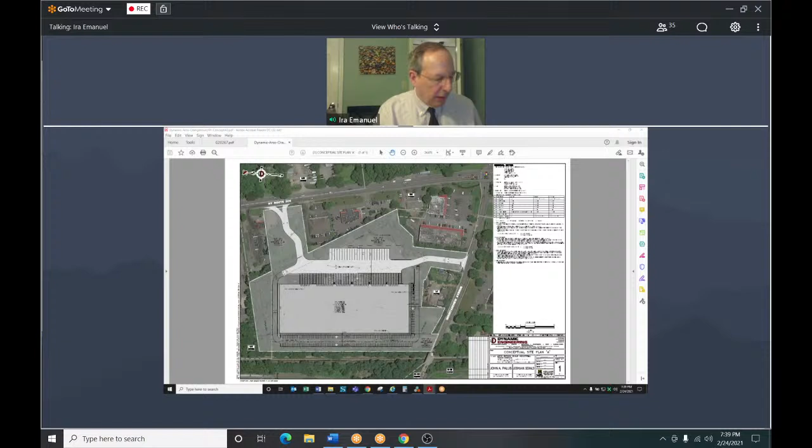With respect to Ms. Slavin's comments, we are aware of that. We disagree with the need for a use variance for the size of the warehouse being proposed, and I'll talk with Ms. Slavin offline about that. I've got some information I can present to her. If we need to get an area variance, I think we can make the case to the ZBA, but it would be an area variance, not a use variance for the size of the building. With respect to her other comments, we don't have a particular problem with them. We understand them.

Item 7, 8, and 9, I would just like to generally discuss. I actually spoke with Mr. Peters prior to even filing this concept plan. I understand his intent and goal is to limit the amount of impervious coverage as much as possible on site and reduce unnecessary impervious coverage. For example, comment number 7 asks us to reduce the size of the access aisles, which are currently 30 to 35 feet wide, down to more of 20 to 24 feet. Overall, for tractor trailers going in each direction, the access aisle must be that wide to comply with that, and we can run truck circulation plans to show why that works.

I do agree with Mr. Peters that the smaller access aisle, like for the car areas, being around 24, 25 feet is more appropriate. However, in the areas where we have tractor trailers coming in from either road, pulling forward and then backing into their loading dock position, there needs to be a nice wide access aisle for safety and maneuverability purposes. Okay, you have to work them out with him. Absolutely.

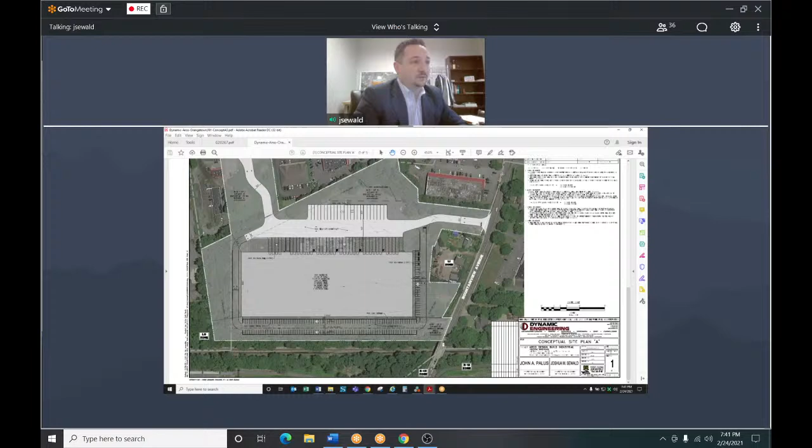And really, I guess this ties in Ms. Slavin's as well as Mr. Peters' review, it's really the parking. The requirement for parking in your municipality is high, it's 586 spaces, and we're providing 180 just to try to get as close as we can to that requirement, even though our traffic regulations really talk about having much less parking, under 100 spaces. I just wanted to get any comments from either the board members or your professionals on if the board is okay with providing much less parking for this type of facility. We think there's always benefits to not paving over unnecessary areas of the lot for parking spaces that will never be utilized. Okay, thank you.

If I may, on Mr. Peters' letter, number 9, where he suggests we use Grasscrete for some of the fire access or fire lanes - does the board accept Grasscrete? Many boards around the county and in the lower Hudson Valley have moved away from Grasscrete because of some difficulties they've experienced with it. But if Grasscrete is something the board is willing to consider, then we will consider it as well. Okay, we have in the past considered it.

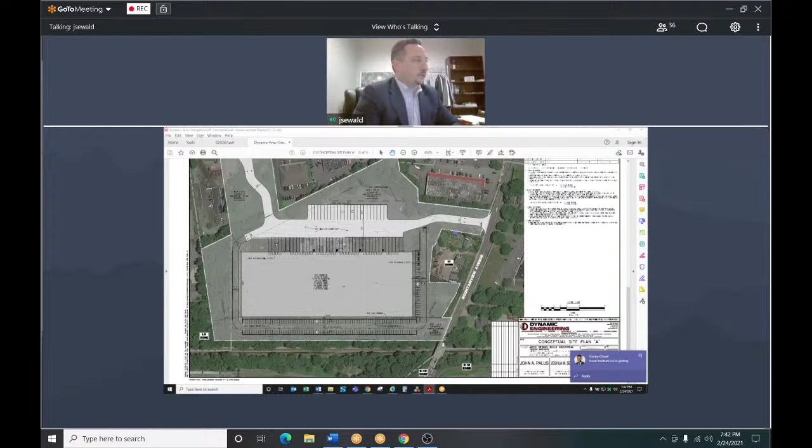Okay, next is the Bureau of Fire Prevention, February 24th, and he has 5 items. Yeah, no problems here, thank you. Okay, Rockland County Sewer District number 1, February 17th.

Same here, no issues here. They have 5 items. No, 4. 1 through 4.

Okay, and then I have a narrative by Mr. Emanuel, and I have a copy of the traffic study prepared by Dynamic Traffic. Cheryl, is there anything that I missed? That's everything. Thank you very much.

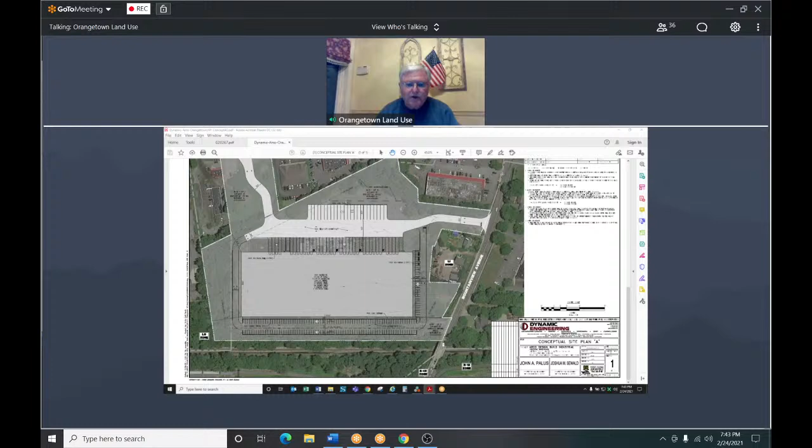I have a couple concerns. Really, this is me, I don't know what the rest of the board feels, but I have a bit of an issue with putting tractor trailers on Mountain View Avenue. It's a 2-lane road. I think, like I said, it's a residential area. There's a couple of schools, there's 2 shopping centers in that area. And I'd really hate to mix tractor trailers on that road. Also,

I don't know if it was picked up in the traffic study, but there's a prospective application across the road over on Greenbush Road, which is going to have tractor trailers in this area. So I hope all this is taken into consideration. Okay, I'm going to open it up to the board now and see what your opinions are.

Thank you, Mr. Chairman. I do have concerns over sending trucks onto Mountain View as well. I mean, the reason why, Mr. Emanuel, you have so many parking spots is because you're creating a large building. But I agree with you in concept that is way too many parking spaces, and I can see you getting a variance for that. Don't mind the access to Route 303 as well, and how busy that road is, and trying to keep trucks off of Mountain View.

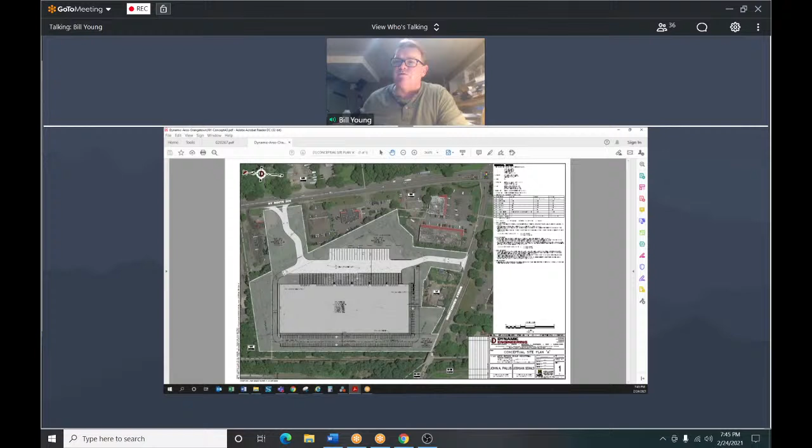Thank you, Mr. Chairman. Thank you very much. Mr. Mandel. Thank you, Mr. Chairman. There's several comments to make on this.

Taking a look, first I wanted to mention the site plan doesn't show the easements. As I think Rockland County Sewer or whoever mentioned, the easements have to be shown here before you can really get a final conceptual plan. The way it looks now, part of that building or parking lot or permanent structures could be on the easements, which would be prohibited. So therefore, I think you have to do that. When you do come back, you have to show compliance with the 303 overlay.

Now, one of the questions I have, what's the proposed use of this warehouse? Do you have a tenant yet? It's a speculative warehouse, sir. Do you have no idea who's going to move in? No. Or what kind of company or how many vehicles or trucks?

Typically, the applicant is an industrial development company. They specialize in knowing the market and the areas and the truck routes, and they have a wide national tenant base that they will be able to lease this building out to. Due to the lengthy process of entitlements plus lengthy process of construction for the size of facility, most of these type of facilities are not leased up at the current conceptual phase.

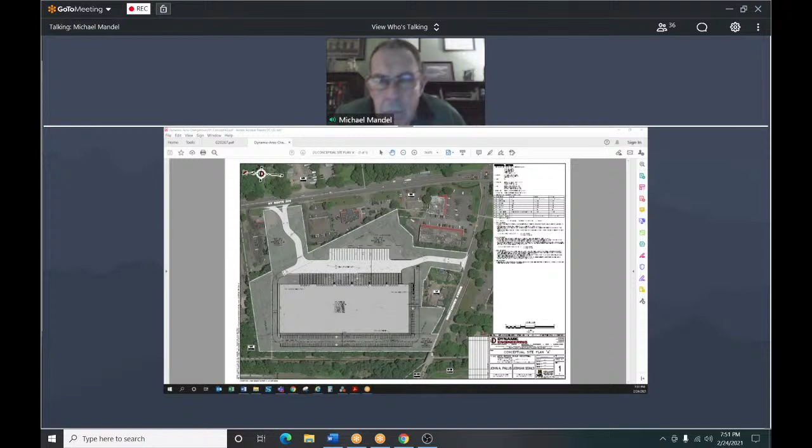I actually have my partner Corey, our licensed professional traffic engineer, on the call. If you could just jump in real quick, Corey, and answer that question.

That's a great question. Because of the impacts of COVID on existing traffic flows, we did updated traffic counts out there, which are current and reflect existing conditions at the intersection. But we also compared those to prior data to see if they needed to be factored or adjusted up to account for any downturn in traffic, which we've seen across the board as a result of decreased commuting due to COVID. So it does account for that, and these volumes were in fact factored up beyond the existing counts to account for any potential downturn in traffic along the 303 corridor.

Amazon is up and running, but UPS is not up and running yet, so I would take a look at that and add that into your traffic study. One last thing.

DEME number 4, they talk about soil borings and perc tests. When you conduct them, they must be witnessed, because we've been having people coming forward without having these witnessed. They must be witnessed by a member of the DEME. If they're not witnessed, they're not acceptable to DEME and therefore not acceptable to us. You'll be notified and made aware of it, and he prefers it being done in the spring or fall when the groundwater is highest. So I recommend, if you go forward, that you speak to him and set those things up right off the bat. Thank you, I have no further questions at this time.

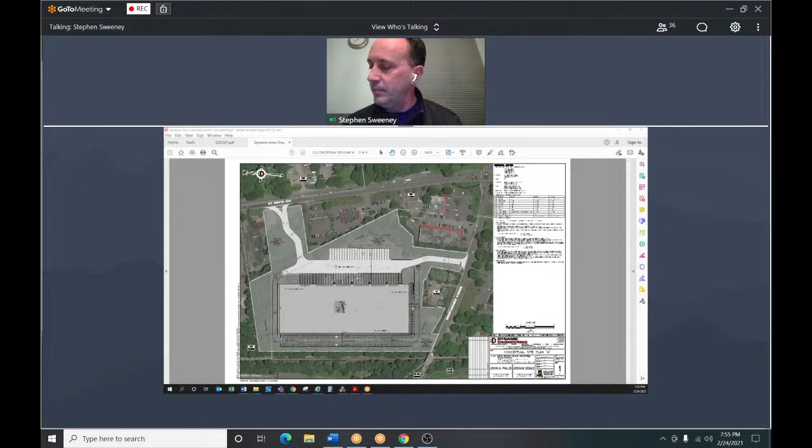Okay, thank you, Mr. Sweeney. Mr. Dell. Thank you very much, Mr. Chairman. First, I'd like to thank the applicants for bringing it in at an early stage rather than at a later stage where they would have spent considerably more resources in developing it and then claim some sort of hardship, which often happens to us.

That being said, I agree with what the other board members said, with all of them, Mr. Mendel, Mr. Sweeney, everybody. I have some concerns myself. First of all, obviously NYS DOT, New York State Department of Transportation, should have something to say about it, and hopefully they would get it back to us in a timely fashion. I would suggest it be sent to them as soon as possible regarding Route 303. With a right exit, I wonder where the trucks are going to do their turnaround. That would be another issue.

But the bigger thing I see here is it's a very large building relatively, and somehow or other, you're projecting only 5 truck trips per day and 1 truck exiting. And this is speculative. I think that figure is more than a little low, because even just filling it up would take you, at the calculations of the size of a tractor trailer, 70 days at this rate just even to get your inventory in there. So I'm kind of questioning this. A lot of the things on Mountain View, with having to obviously go out into the other lanes of traffic in order to come in and out, are a problem. I think a number of those things should be studied.

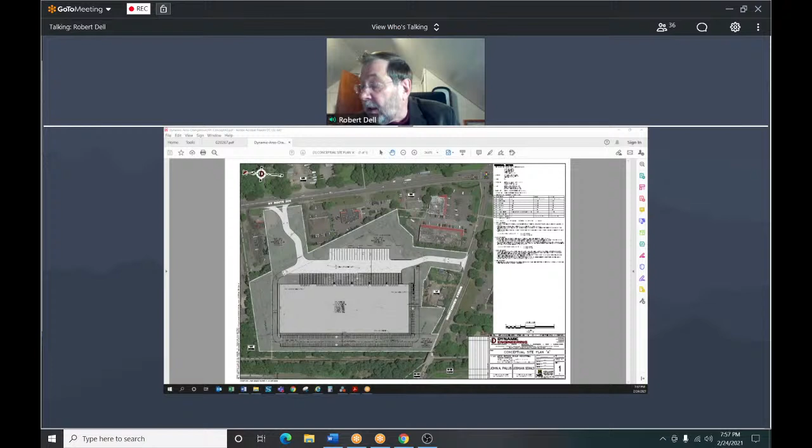The other thing I don't want to see happen, which sometimes happens with this, is we get a very rosy picture of what's happening. Oh, it's only going to be 5 trucks per day. And then when tenants start coming in, all of a sudden we hear, oh, we have a hardship situation here, so we'll need special accommodation. It's just a pattern I've seen happen many times over. I don't mean that your company is going to do that, but it's just something I think we should be more than a little bit aware of.

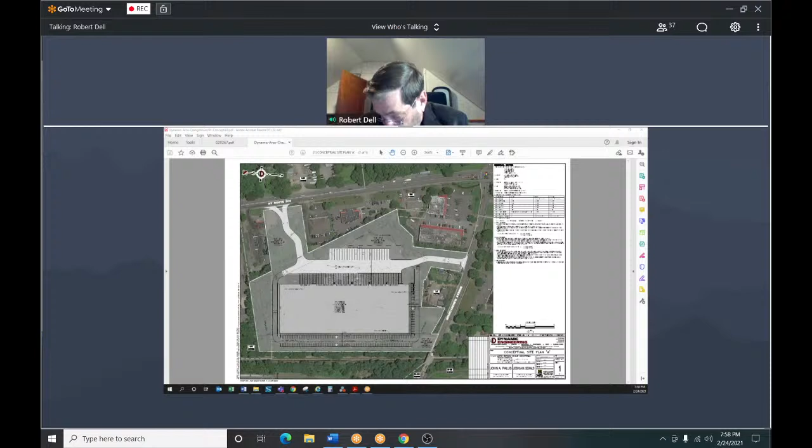The idea of using Grasscrete, I think I have no problem. If you ever had a good location to put something like this in terms of the neighborhood, this is probably close to an ideal situation. You have the railroad, you don't really have any residential areas, and I think on that part of it, it's probably a good idea.

But I question how this is going to end up. And most important, I think we should get our traffic, an independent review, to look at this and verify all this and help us with our determination. I have no doubt of the validity of your studies, but I think it's probably based on more than conservative estimates as to the actual amount of traffic that could potentially be used on this site.

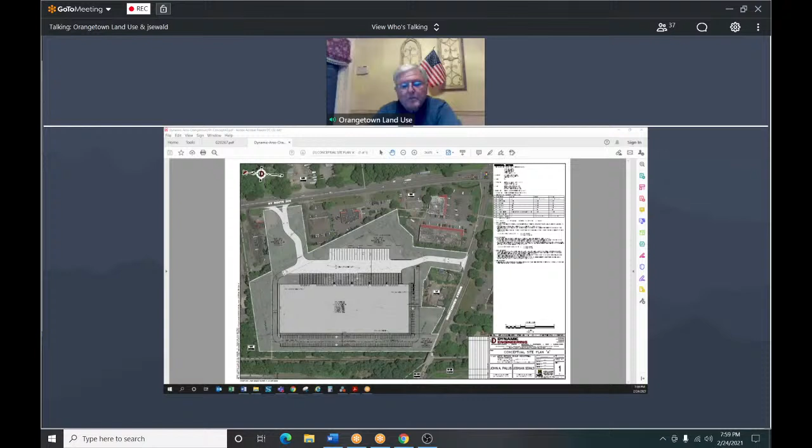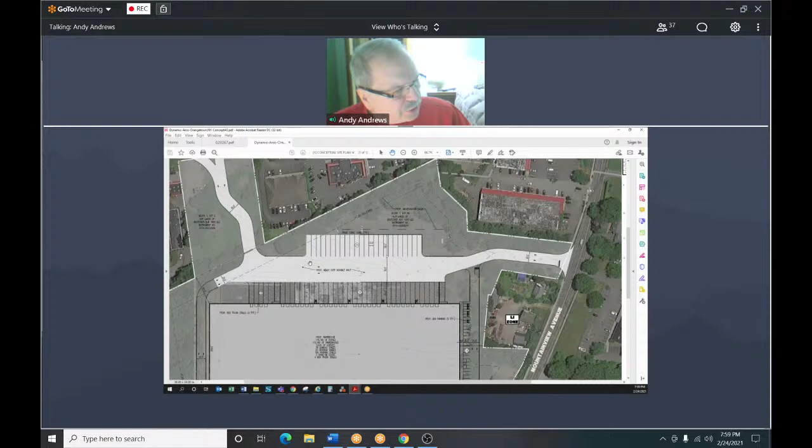I would just like to ditto everybody else's concerns. I noticed that you have 4 box truck stalls and 29 loading stalls. That's an awful lot of stalls for only the few trucks that you got coming in and out of there. So I was just wondering about that.

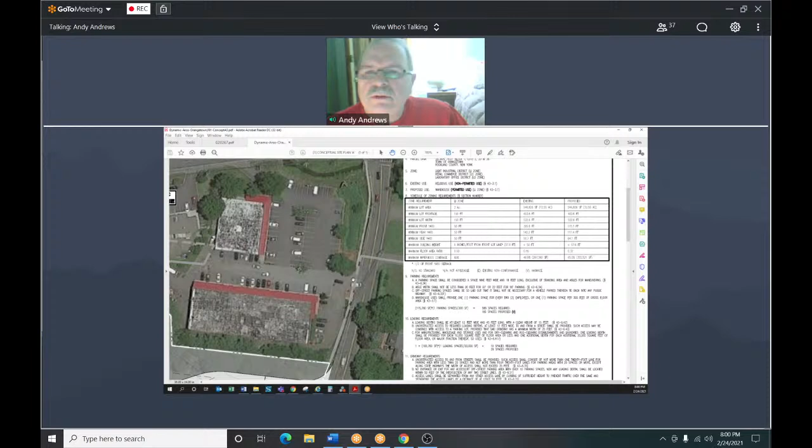The building is over 4 acres big. Does anybody know what the footprint is of the building that's there now? It's approximately 106,000 square feet, I believe. So this one's 70,000 square feet bigger. Correct.

The idea about coming in and out of Mountain View Avenue is not a good one. If you straighten out the driveway going out to 303, that's a much better idea. That'll allow trucks in and out. You got a much better turning radius out on 303 that's bigger.

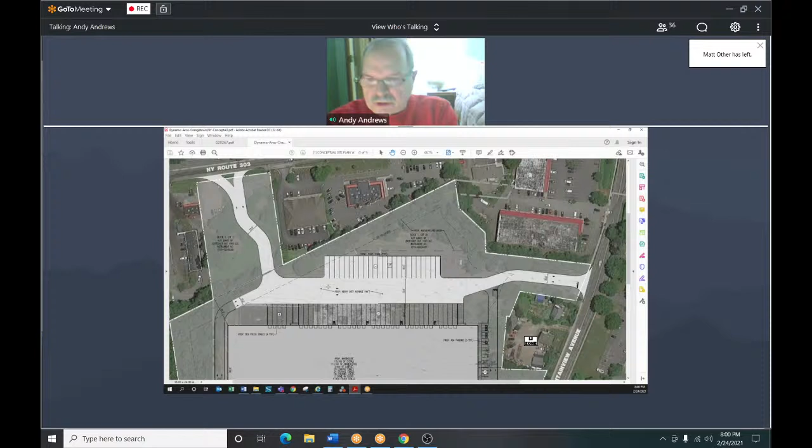One other concern that I have that wasn't mentioned is we have Amazon going in up on 303. My concern is that this is such a large warehouse that I was just wondering if this might take some overflow from Amazon, creating some more Sprinter trucks coming in and out of there besides tractor trailers. So that's a concern because you guys don't know who's going to go in here. And I think that's all I have right now.

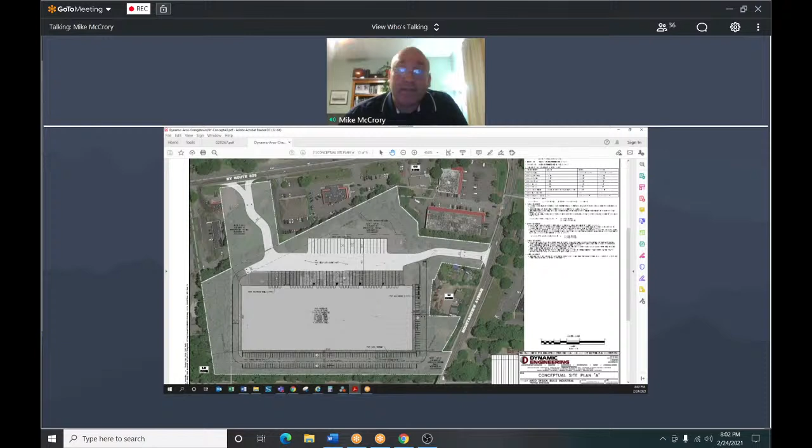And now you're having this big warehouse with no known tenant, truck problems getting on Mountain View Avenue. Even coming out of 303 is going to be a problem because there's a light right there. Right when they make that turn right, I can see it being a big disaster. And a lot of flaws in the traffic study. It doesn't include UPS, Amazon. You don't know who the tenant is, so how can the traffic study hold any weight right now? And it's a very stressed out area.

I can see this being major problems with the neighbors and with the board when we see the final plan. So that's my only comments. I just got a lot of questions. So thanks for representing it. That's it, Chairman. Thank you, Mr. McCrory. Okay, Mr. Bond.

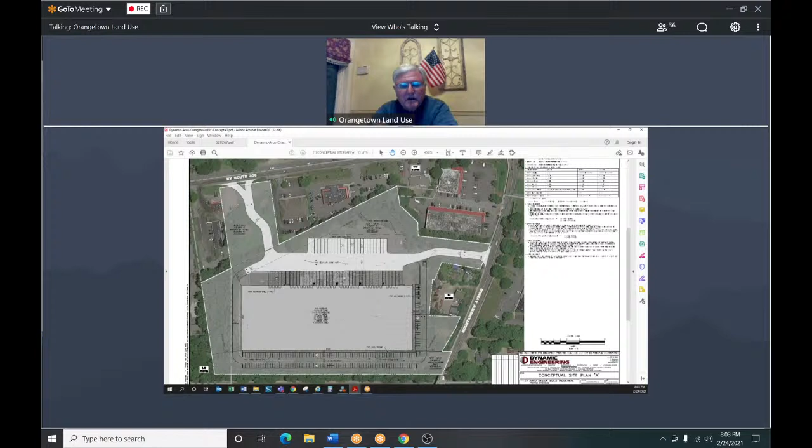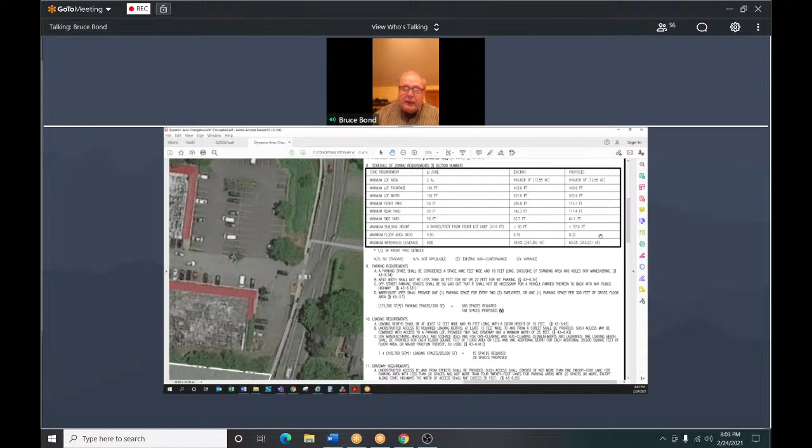I just think the warehouse is 175,000 square feet. That's a big warehouse. When you've only got 100,000 there now, I think that's kind of overdoing it a little bit. And on the coming out on the 303, has there been any thought to making improvements in terms of a traffic light? Not necessarily there, because that might be too close to the one on Mountain View, but maybe down on Glenshaw, to make it easier for your trucks to get in and out. Has there been any thought to a traffic light?

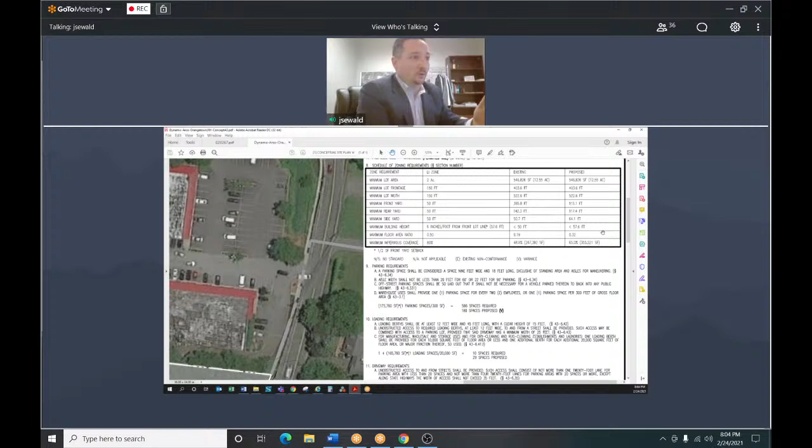I can let my partner Corey jump into it, I know there's a lot of comments flying around. And to comment on the previous point, Mr. McCrory, we appreciate the board professional's review letters that help us determine the next step. We understand the Route 303 overlay, and we agree with you. Our comment was just that, in lieu of sending truck traffic that is a permitted use within the underlying LO zone onto Mountain View Avenue, it was a consideration for the board to utilize Route 303 where truck traffic is allowed. We absolutely respect and understand the purpose of the overlay. That was an option because of all the other concerns board members had about using Mountain View Avenue for our access.

In regards to a traffic signal, even though the building is 175,000 square feet, because of the use nature, it is not an Amazon. Amazon is e-commerce, high fulfillment, lots of vans. It's under a different land use code in regards to traffic generation. I don't believe a traffic signal will be warranted at our driveway at 303. Corey can give a little more color on the different ITE land use codes and why, even though this is a big building, not a lot of traffic is generated based on the type of facility it is.

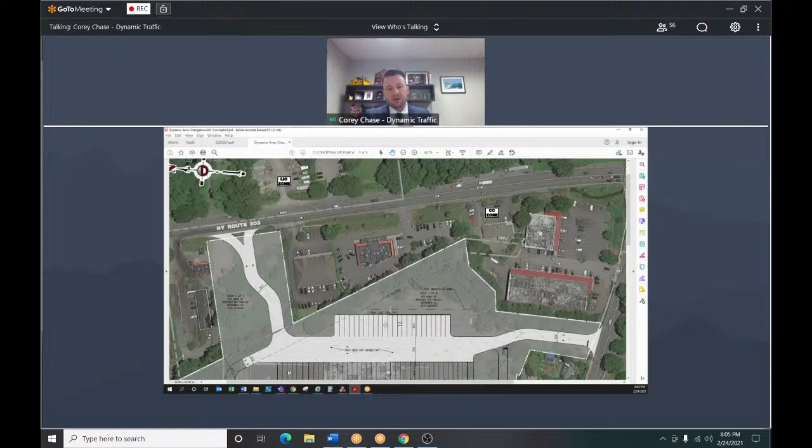Certainly, and Josh was correct. There are certain traffic volume thresholds required to be met to install a new traffic signal. Because of the traffic projected to be generated by the warehouse, even though it is 175,000 square feet, overall from a traffic generation standpoint, it's not a significant traffic generator. The numbers a couple of board members were referencing from our traffic study are peak hour traffic volumes. That's what we focus on when we analyze traffic impacts - the weekday morning peak hour and weekday evening peak hour to determine rush hour impacts. Those truck volumes referenced, the 6 trucks, that's 6 trucks an hour, approximately 1 truck every 10 minutes.

The ITE and NYSDOT have a threshold for a significant increase in traffic of 100 trips or more during a peak hour. That's what they consider a significant increase with potential significant impact on prevailing traffic conditions. This use in totality would only generate approximately 50% of that threshold - approximately 50 additional trips during a peak hour, which comes down to about 1 trip every minute during that peak period. So overall, not a substantial traffic generator, and that's why we can require significantly less parking than what the ordinance requires. We heard the board's comments and we'll be happy to add in any additional traffic studies we can obtain from the town and include those in our analysis. But again, we're talking about approximately 1 trip every minute during the peak period, not a substantial source of traffic generation.

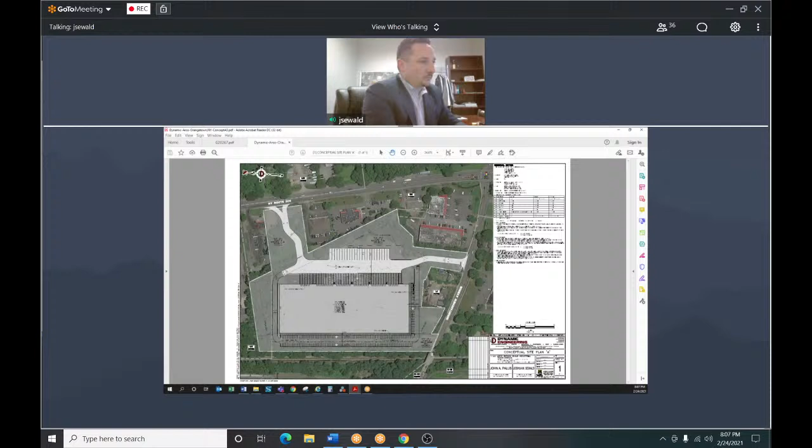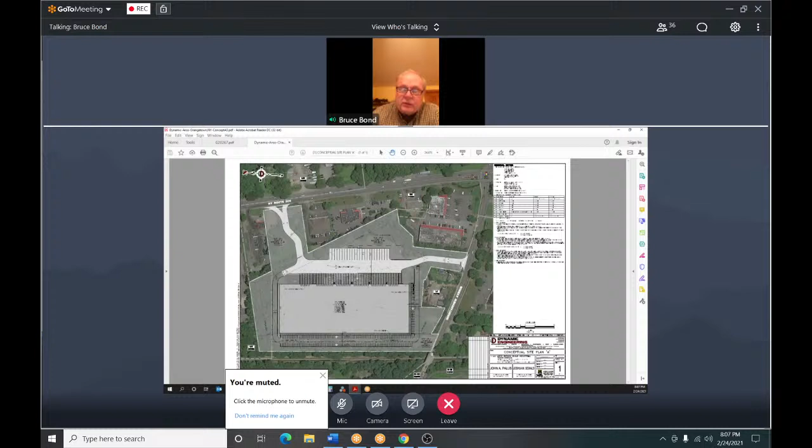Okay, but in terms of a traffic light, we made Lowe's put in a light that came from the planning board when that project went in. And we also had one put in down by the old 303 drive-in - I guess it was FedEx - when they came in, that light they had to do to get that project through. That was all done because of the planning board, as well as the turning lane put in for Rockland Toyota. So understood - there were improvements required on 303 in order to get their projects through. I understand that, sir, but the issue is Mountain View Avenue, that's a bad intersection.

It's a crazy intersection right now, and to put more traffic on at that intersection is just insane. So understood. The issue we're going to run into is the state's going to require that you meet a certain volume criteria to warrant the installation of an additional traffic light.

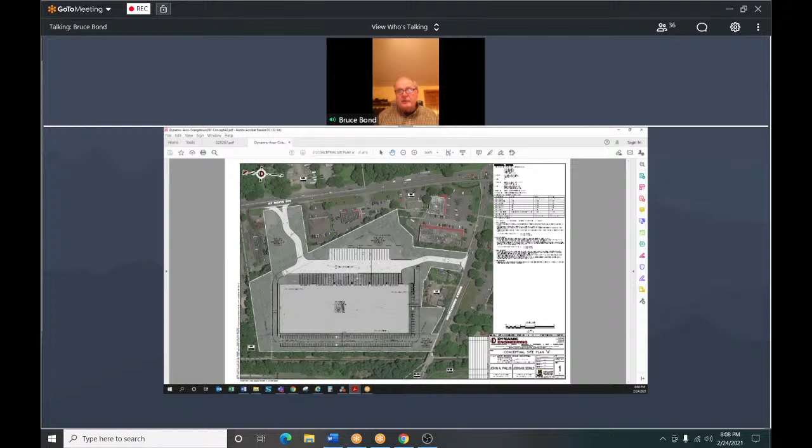And that criteria is high, and this development wouldn't satisfy those traffic volume warrants to install a new traffic signal. So if you don't generate a certain level of traffic, they might not let you put it that close to the other intersection. It might have to be down further, maybe like Glenshore Road or somewhere down there. But I can't imagine they wouldn't let you put another traffic signal in to slow traffic down there. I just find that hard to believe because they've done two already, and we've had no problem getting either one of those through the state.

FedEx is a substantially higher traffic generator than what we're proposing here. So certainly a development of that nature, as Josh mentioned, there are various warehouse land use categories. They define that as a parcel hub, that generates 10 to 15 times more traffic per hour than what we're proposing.

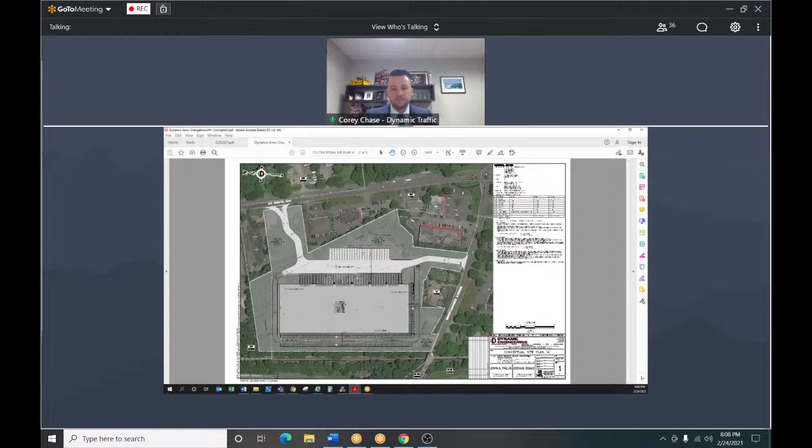Thank you, Mr. Chairman. It should be pointed out again, I want to make it clear, that Mountain View Avenue is a residential street. It was never designed for tractor trailers entering and exiting. You would need a deceleration lane. If you're going to be having it there, you should have only a left-hand turn coming out of there. Otherwise, you'd be sending it up through the residential areas to the west, which is something I don't think any of us would want to do.

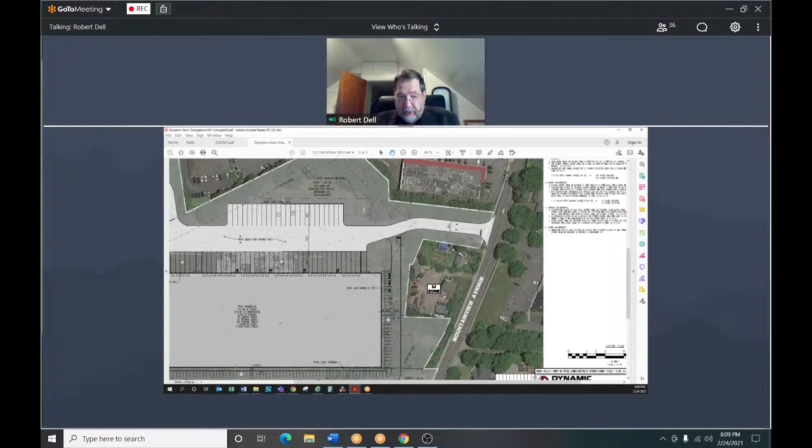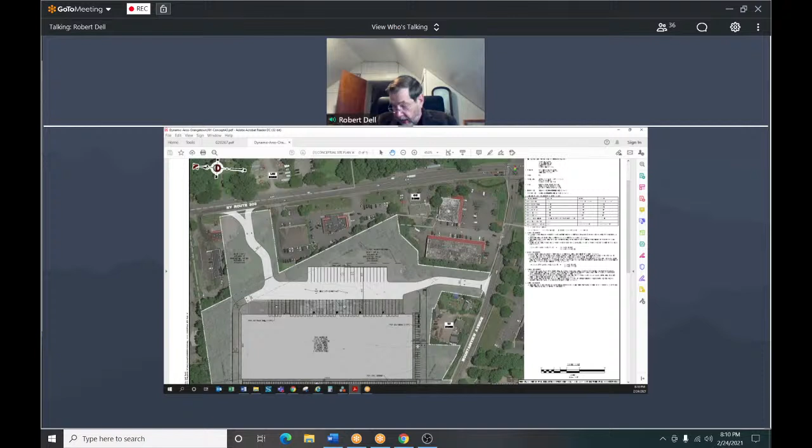You'd probably eventually have to have some sort of acceleration and deceleration lanes on Route 303. But if you're getting the amount of truck volume they're talking about, a truck exiting first has to wait for a break in the traffic. And then when it finds one, it won't be entering the traffic at full speed unless the light is down. So you're going to have a backup as the tractor trailers come up to speed. In addition, there's a backup when they reduce their speed and enter. I think it's looking like it might be a problem.

The other thing is the applicant is saying what will generate traffic, but obviously they have no tenants, and we have no idea what will come in and what will be attempted afterwards. This is speculative, and if it's speculative, I think we should go towards the high end, not the low end, which is why I strongly suggest we try to get an initial independent review from one of our consultants for the traffic, so we at least have an idea of what's going on. Because right now it's completely unclear to me, and I see a great deal of potential problems coming as this gets later in the development process, assuming this is the way they're going to go.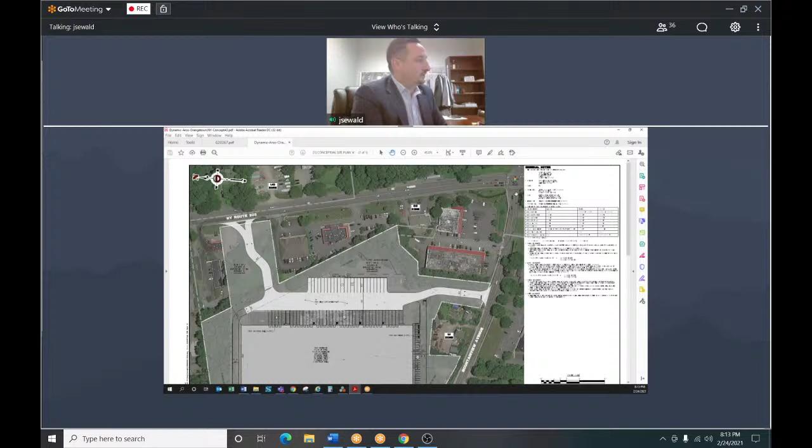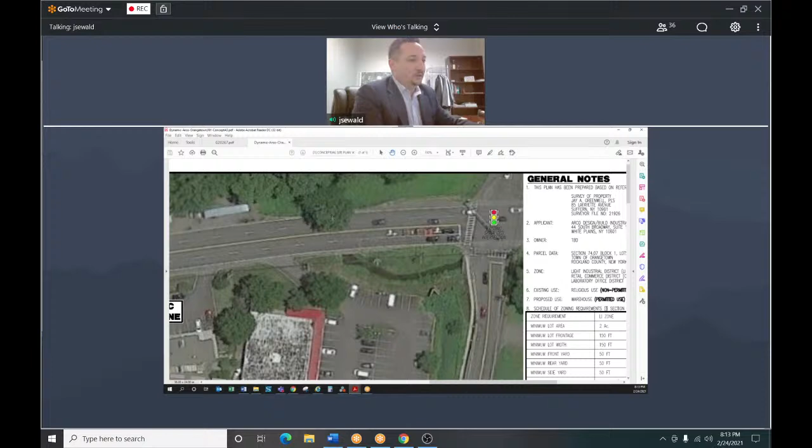Yeah, this driveway is contemplated at right in, right out. And regarding one of the previous members' questions, we have no anticipation of any trucks going westbound on Mountain View. However, in order for a truck to make a left turn to go back to 303 north, which is where we think the majority of the traffic is going to go towards 287 into the north, our trucks will make a left onto Mountain View Avenue and then come through the intersection. But that movement is not a problem because it's signalized and there's plenty of room within the existing signal area to maneuver onto 303 north. Those exhibits we provided are the other movements, which is why we're hoping for your support for the right in, right out on 303.

So regardless of the plan, the trucks going northbound still had to get onto Mountain View Avenue and make a left at that light. Is that the current plan? That is the current plan. There's a lot of problems with that, but all right. Thanks for clearing that up. Okay. Thank you, Mr. Emanuel.

Yeah, just one further thing on the plans. I think on both 303 and Mountain View Avenue, they have to show the driveways of all the facilities, because it looks like it may be opposite the driveway to Del Arte, the restaurant and that shopping center. So I think what they have to show is coming down south on Route 303, all the driveways that are coming out, and also on the northbound side of 303. And similarly on Mountain View Avenue, the driveways on both the east and the north and south sides, because you have a shopping center there where the cars come out, there is residential with vehicles, and the other shopping center. So I think that would be a requirement so that we have a better idea of what's actually going on there. So thank you.

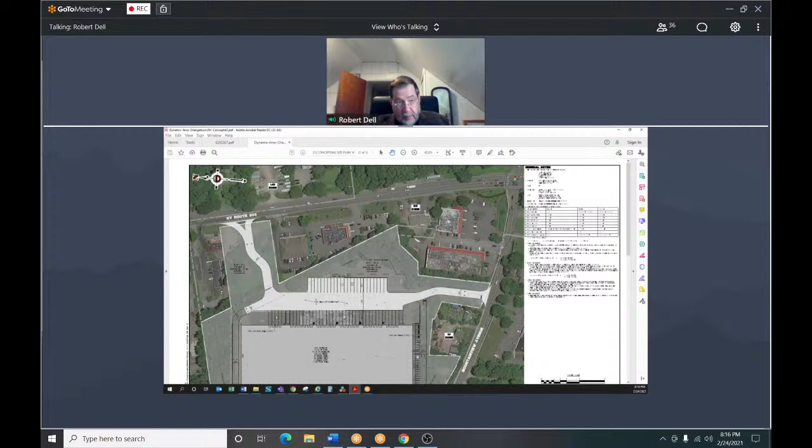No, I understand that, but we may, even at this point, before they come back again, want to consider having an independent review of this. Otherwise, it's just going to delay the application and cause a lot of issues. Okay, thank you. Find out what our consultants have to say. Thank you very much, Mr. Chairman.

Okay, thank you. Okay, I want to open it up. Yes, Mr. Emanuel. Yeah, Mr. Chairman, to that point, we certainly have no objection to the board hiring its own independent traffic consultant to review at the appropriate time. Okay, thank you very much.

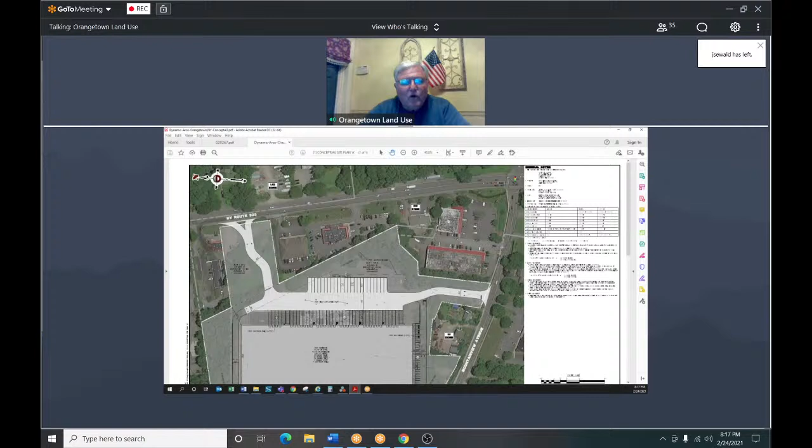Okay, we're going to do something a little bit different. I'm going to open it up to the public, but I want the public to be aware that the board is not making any decision either in favor of or against this application. This is strictly a fact-finding session for the applicant to hear what the board, the town, what we have to say. I want to open up to any of the public and also have them express their opinion. But again, like I said, we are not approving or disapproving anything. So if there's anybody from the public that wishes to address this, please state your name and your address.

Chairman, this is Vanessa Lappins. I live at 659 Western Highway in Blauvelt, New York. May I go first? Yes, ma'am.

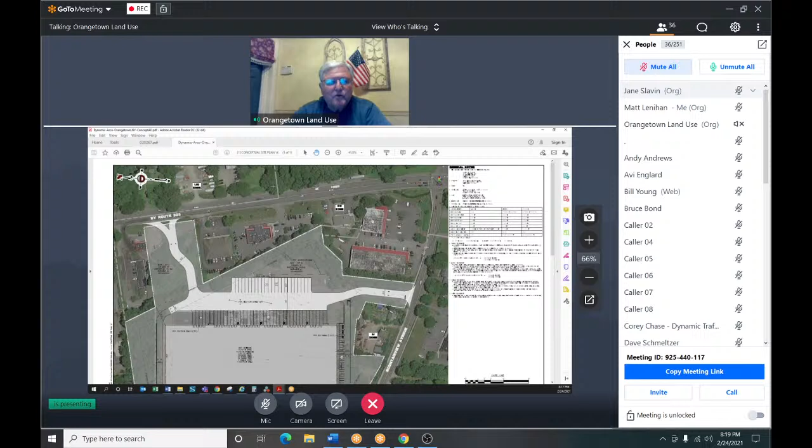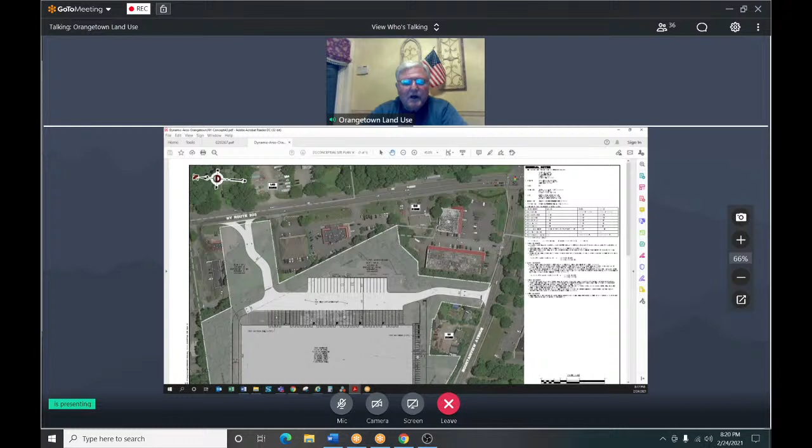Mr. Emanuel, you can hear that the board has a lot of concerns. I think a lot of us are very concerned about putting truck traffic on Mountain View Road. Personally, I really wouldn't like to see that. If you straighten out the roadway going to 303 so that trucks can turn either right or left without anybody coming in through Mountain View Road, I think that might be a little bit more endearing to the town and the board. But as you can see, there were a lot of concerns, and I think you have your work cut out for you, sir.

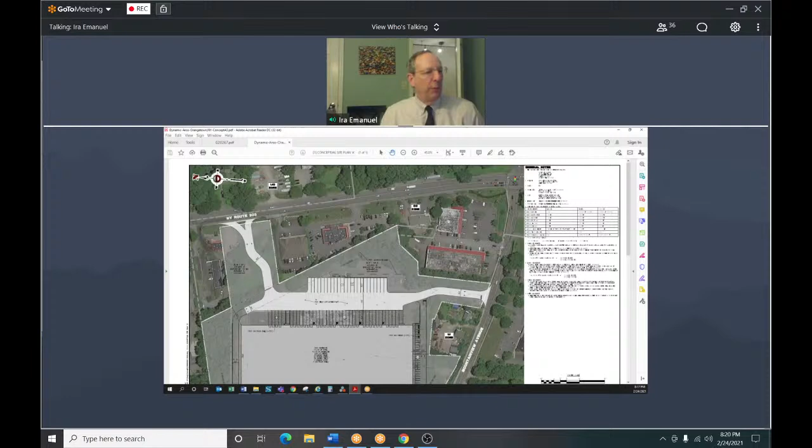Well, I appreciate the expressions of concern by the board, and the thoughtfulness of them. I've got almost two pages of notes from the board's discussion, in addition to the comments from your consultants. We'll certainly take that back. As we've said from the very beginning, we would like to keep as much traffic off of Mountain View Road as possible, because we recognize that's a better solution. So we will take back the information and concerns, go back to the drawing board, and see what we can come up with. We appreciate the time and effort the board has put into this. Thank you, sir. Good luck with your project, one way or the other.

Next application is PB 21-11, 20 Mountain View Avenue, a conditional use permit. Mr. McCabe. Good afternoon, my name is Tom McCabe. I'm a small business owner, and I'm here to ask for a conditional use permit to operate a secondhand store out of Unit G, in the 20 Mountain View Avenue strip mall. Not sure what questions you would have.

Okay, thank you. I'll go through the reports, and then we'll open it up to the board to see what their concerns are. Office of Building, Zoning, and Planning, Jane Slavin, February 19th, has two comments. Sir, do you have all these consultants' reports? Have you been given them? I do. Okay, good. If you have any questions while we're going through them, we'd be more than happy to try to get clarification for you.

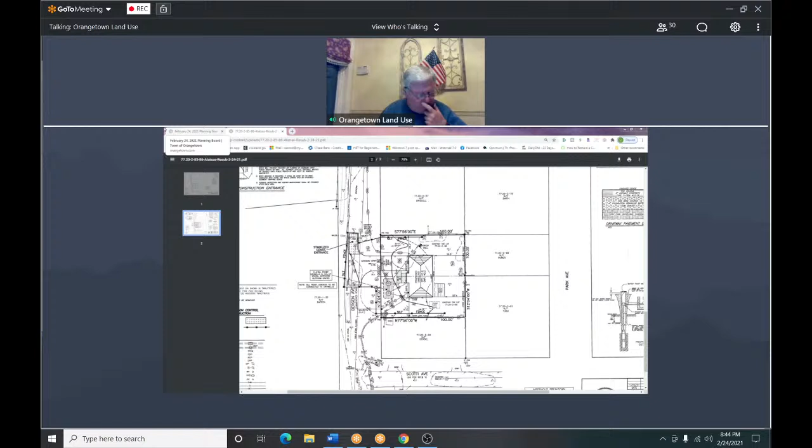Thank you, Jay. Okay, and we have a letter from Mazer for drainage. The above comment represents our professional opinion and judgment, but may not necessarily in all cases reflect the opinion of the planning board. Overall, the proposed stormwater management plan meets the intent of the regulation, and therefore we recommend that the re-subdivision of land of Alatsas be approved for drainage, subject to the above project comments, of which there are 7.

I have no objection. Okay, thank you, sir. Bureau of Fire Prevention, Town of Orangetown, February 24th, they have 2. Rockland County Planning, January 19th, okay, just a letter. Rockland County Sewer District number 1, January 8th, they have 2 comments.

Letter from Helena Power, dated February 23rd, she's an abutting property owner. I also have a lead agent letter from the Rockland County Highway Department, dated January 27th. I have a lead agent from Orangetown ZBA, February 3rd. I have a letter from Rockland County Highway Department: this project is out of our jurisdiction, dated January 27th.

I have a letter from Suez saying no further correspondence for this site should be sent to our agency. I have a letter dated January 27th, Rockland County Highway Department, saying this project is outside our jurisdiction. And that's it. Cheryl, anything else? That's it, Tom. Thank you very much.

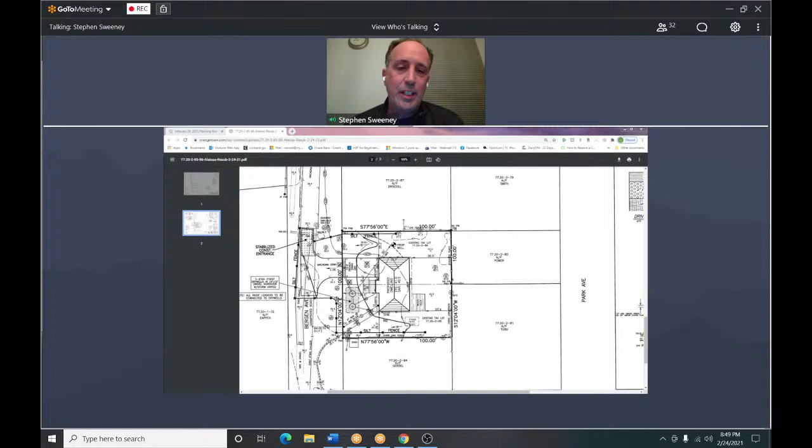Okay, basically all this is right now is a lot merger. It's got nothing to do with the house at this point, so they would have to come back. But usually if we approve a merger, we don't get to see the house—it goes to the ACA board, not back to us every time. I think we should make it a condition that when a house is proposed, it does come back to us.

Okay, there's no problem. Okay, Mr. Dell. Well, thank you, Mr. Chairman. I think the other members have expressed a lot of my concerns. One thing that would help me have a clearer picture is to ask Mr. Greenwell what are the sizes of the contiguous lots to this area. It looks like one of them is 5,000 square feet.

Yes, if you look at the drawing in front of you, Mr. Gensel's lot to the south is 50 by 100. The lot to the southeast is 100 by 100. The Powers lot is 50 by 100. And the two lots to the north, northeast and directly north are also the same size as this lot. So it's very much in keeping with the character of the neighborhood and the size of this property and the proposed house.

Now, going back to the idea of coming back to the planning board, it was our intention, if the board was disposed to agree to this lot line merger, to go to the ACA board and the Zoning Board of Appeals and then come back to the planning board for a final subdivision, so we could handle it all rather than get a subdivision, go to ACA board, and then come back to you for a site plan—if that process would meet with your approval, if you were so disposed to move forward.

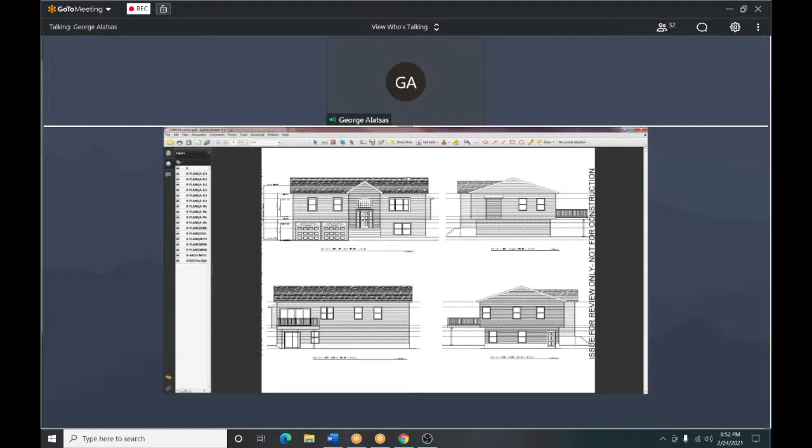Mr. Alatsas is on the line. George, you want to clarify what you intend to build here? Yes, hi everybody, how you doing? Thank you. We're here strictly for the lot line change. We don't want to get involved with the house at this point right now, because unless we go ahead with the merger on the lot line, there's really nothing they can build there.

So I think instead of going through and looking at the house, just look at the lot line, merge the lot lines if that's what the board wants to do. Because we did this last time and it got a little carried out of hand—what we were doing was a lot line merge, and then we got too involved with the house itself. So let's look at one step at a time, Mr. Dell. Okay, well, Mr...

Chairman, my idea was to give the applicant a heads up that the actual area of the house may come into question later, rather than having expectations - we submitted a two-floor house and that's what we're going to get. Now, in this particular one, I would like to hear what the contiguous property owners have to say, and also what the other board members have to say. But it looks like a decent layout for what you have - it is a most unusual site in a most unusual neighborhood. Thank you very much, sir.

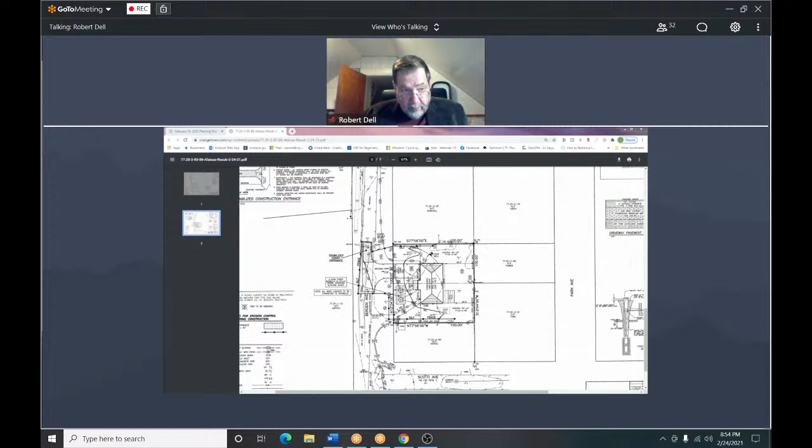Okay, Mr. Dell, thank you. Mr. Andrews. I'm okay with the joining of the two lots right now. I'd like to see what the public has to say, and that's all I have.

Okay, thank you, sir. Mr. McCory. Thank you, Chairman.

Obviously, the intent of this lot merge is to develop on a non-compliant lot. So I know you want to separate the two, but in my mind they are connected, and it will affect my decision. And once again, we have the neighbor, Mrs. Power - she seems to be a regular customer who constantly has to worry about developers coming in, buying up a couple lots and then asking permission to build non-compliant on a non-compliant lot. The neighbors shouldn't have to constantly worry about this. It's the job of the planning board. On the planning board review, we had to look at the intent of the zoning code, which says a minimum lot size of 15,000 square feet.

It's cut and dry. The owners know what it is. I think the owner doesn't even live there - lives in Jersey - but is looking to develop it and not be affected by it. The neighbors, once again, will be left affected by the development down there. We let them do it around the corner not too long ago, and they came close to R15. This lot doesn't come close. According to the calculations, which add up to 10,000 square feet, it's 5,000 square feet short. It's cut and dry - I can't remove the lot line merger from development, because that's the intent of this plan. That's my own comment.

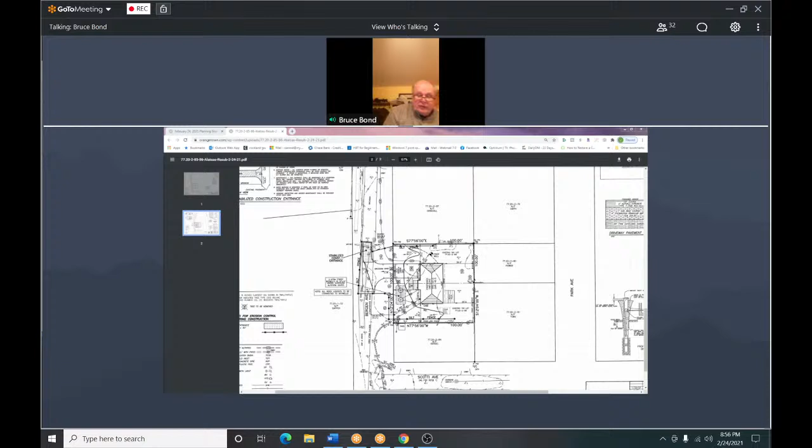Yeah, basically what we're doing here - we have an R15 zone and we're creating an RG lot in an R15 zone. I know we've had some come before us that were at least close to the 15,000 square feet, but 10,000 is not even close. And they need a variance for the floor ratio and then one for the rear yard. I don't know, I have a problem with it.

Okay, thank you very much. That's it. Okay, thank you. Do any of the other board members have any questions or comments? Okay, I want to open it up to the public session. Anybody from the public wish to speak on this application?

Hi, I'm Helena Power. Can you hear me? Yes, ma'am. Okay, well, yeah, you're right - I'm a frequent flyer. I don't get any points for this, though.

I appreciate Mr. Greenwell's detailed examination of the lot lines. However, tax lots are assessed based on surveys. And when I examine the tax lots, the adjacent tax lots for the properties that align - my tax lot is currently listed not at 5,000 square feet. I certainly wish it was. It's 4,791. The tax lot at 2 Scotty, which is the Gensel property, is 5,227. It's 227 feet over. And Mr. Greenwell, you know that.

The 5 Bergen and 9 Bergen - I guess those, oh no, wait a minute - the Driscoll property flanking the other side is 10,018 square feet. The same with the Tubo property, 10,018 square feet. If we don't use the actual tax lot surveys, then what exactly are we measuring?

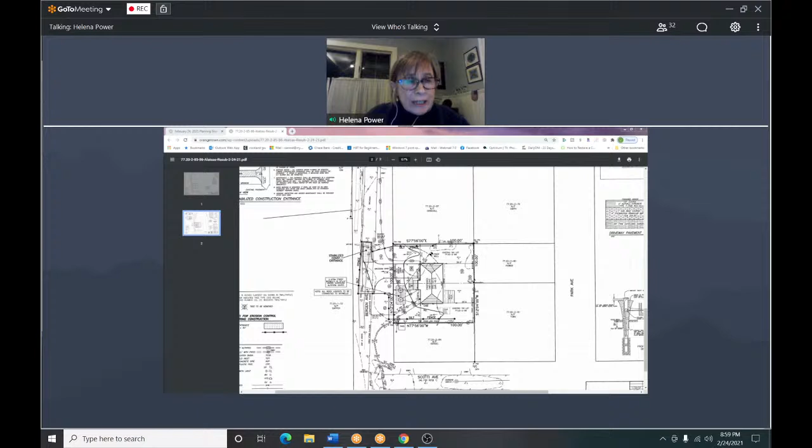I'm hoping that's the case here. I do think we need to look at the legal standard here. If you examine a tax lot as an indication of exactly how big a property is, the property you seek is much smaller than even a 10,000 square foot lot. It is 0.11 per lot, combined 0.22, which equals 9,584 square feet. That's what you've got.

My name is Mary Driscoll. I actually own the Driscoll lot next door to the empty lot.

Another concern I have is the size of the road. Anyone who's visited the lot knows the road on Bergen Avenue cannot hold two-way traffic. What will be done with the road if there are 2 houses on Bergen Avenue?

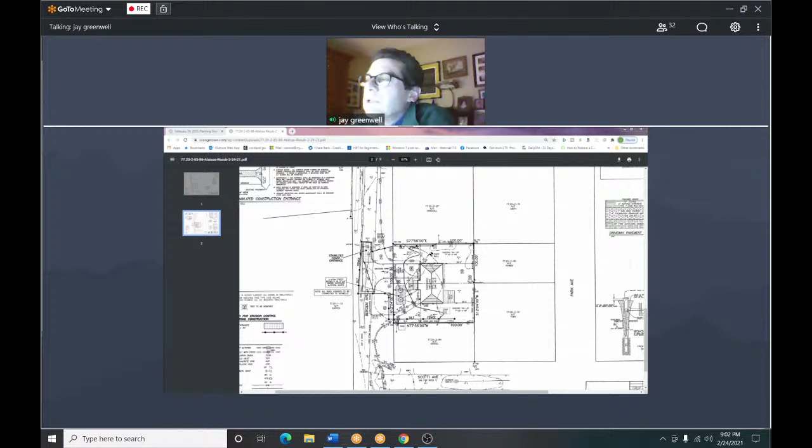Secondly, with respect to the road, the DEME and the fire inspector have both addressed what they would like to see. The fire inspector wanted a minimum of 12 feet, and DEME is looking for it to be widened to match the existing at 16 feet. So that's what we would agree to with respect to the width of the road. Thank you, Mr. Chairman.

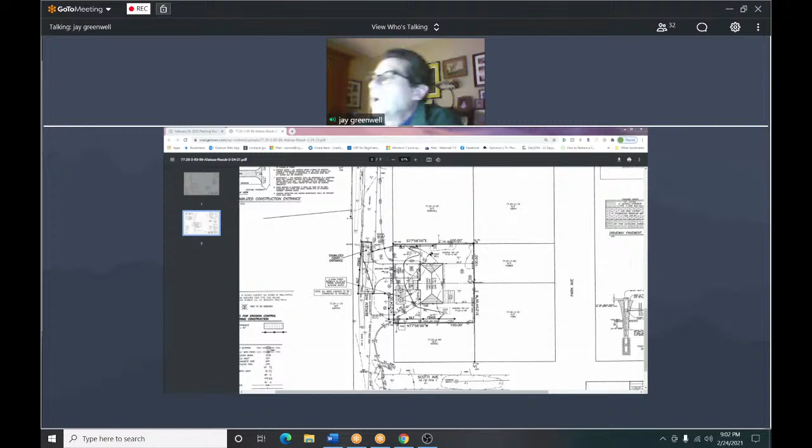Can I just ask one question? Does that mean all of Bergen would be widened and my front lawn would be cut into? No, it would only be widened from the southerly terminus until the proposed driveway area, which would then provide a turnaround. Okay, but if I'm coming into my driveway and they're leaving their house, how would we pass each other? Because they have to pass my house to exit.

A 16-foot road would be sufficient. It would be tight, but sufficient. So do we know the current width of the road in front of my house? I don't know the width of my road. That's what I'm asking. 16 feet. Okay, thank you.

Can I have a motion to close the public session? I make a motion to close the public session, Mr. Andrews. Thank you. Do I have a second? Mr. Sweeney. Okay, thank you. All in favor? Aye. Any opposition? No. Can we take that screen down, please?

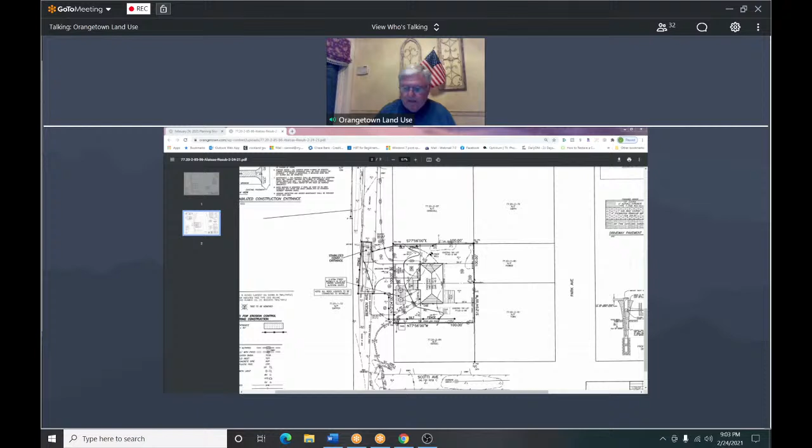Okay, what does the board want to do on that? I know there's some concerns about the lot size. I don't know what the board wants to do.

Does, okay, Mr. Dell, go ahead. Yes, I'm echoing what you're just saying. I think on this one, I would like to hear a little bit more specifically how the other members of the board feel, because I'm kind of torn on this. A 5,000 square foot lot, 50% below what's required, could send us down a slippery slope in terms of other subdivisions, and it will probably be used against us in terms of precedent. But then again, it's a unique situation, and I would like to hear what the other members feel, because I'm sitting on the fence.

So is it possible to express their overall opinions? I'm sitting on the fence. Thank you, sir. Okay, thank you, sir. Let me poll the board. All right, Mr. Young, do you want to move forward with this, or are you concerned with the undersized lot?

I'm willing to move forward with this only based on the condition that Mr. Sweeney had mentioned earlier about coming back to us with the plan. I agree with Mr. McCrory and Mr. Bond. This is a sorely undersized lot. And the only consideration I'll give is if we go with Mr. Sweeney's recommendation.

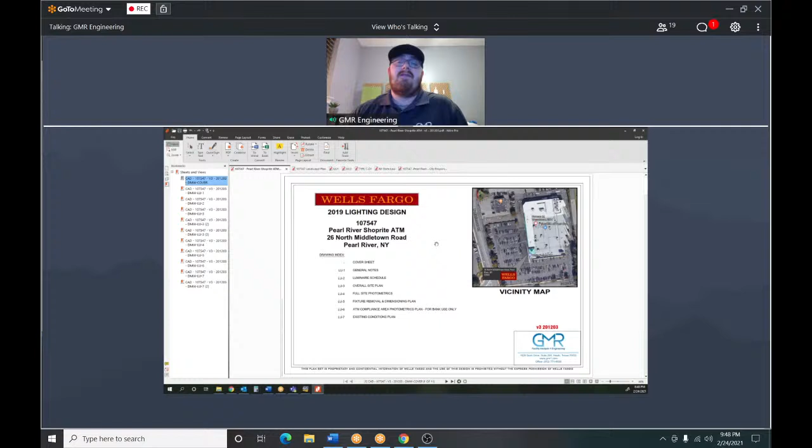Yeah, here we go, not a problem. Like I said, my name's Josh Wagner. I work for GMR here in Dallas, Texas. We're working for Wells Fargo creating a lighting plan that meets and suffices the New York State statute regarding financial institutions. So what we've done here is we've taken existing lighting that's currently in the shopping center, and we've upgraded it to meet those minimum requirements that New York sets for financial institutions. So everything in blue you see is new fixtures. Everything in green is existing fixtures that we're replacing with LEDs, one, for more aesthetically pleasing fixtures, and two, to meet the minimum requirements for New York.

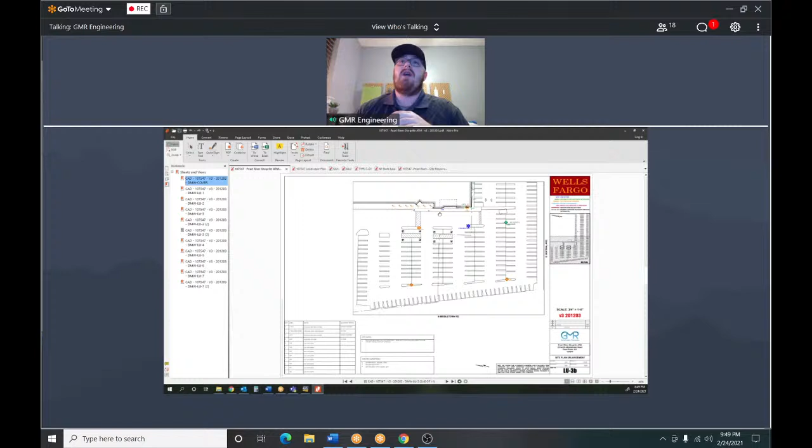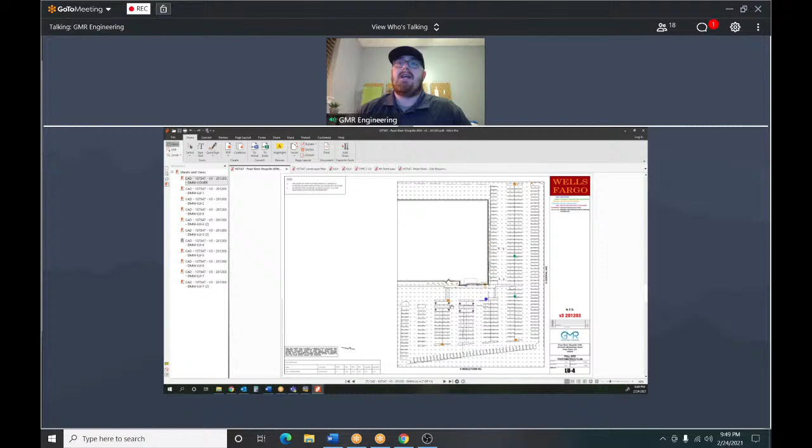So we are adding, it looks like, a couple of new fixtures, 1 wall pack and 1 new pole out in the parking lot. We're replacing 2 parking lot poles and replacing a few wall fixtures along the wall. So pretty minimal in the amount of work that we're doing. We do work all across the United States for Wells Fargo, Capital One, Bank of America, things like that, so this plan is pretty normal for us. I'd be happy to answer any questions you guys might have regarding the New York State statute or Wells Fargo's plan moving forward in regards to the lighting.

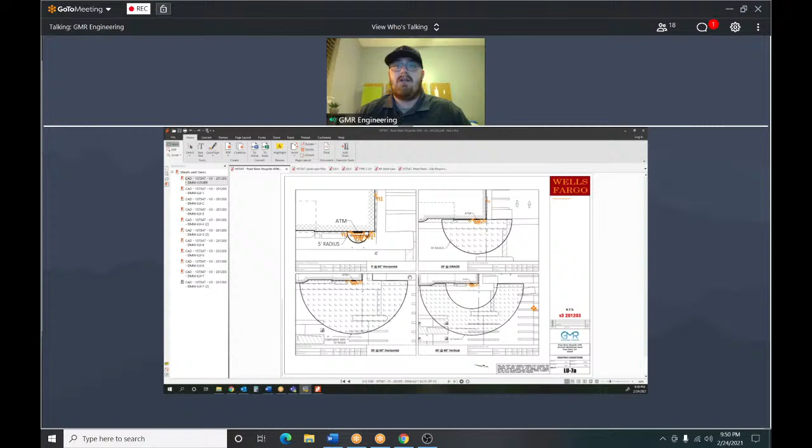So I've included the calculations for New York State statutes, and I've also included in the plan your existing conditions plan, what you currently have on site and how it is not sufficing to the state statute. So we can see that all in the plan that was provided. I'd be happy to go into more detail if you guys have any questions at all. Okay, thank you very much.

Let me go through the consultants' reports. If you have any questions on the consultants' reports while we're going through, please go ahead and ask them, okay?

Office of Building, Zoning, and Planning, Jane Slavin, February 19th. She has three items. Department of Environmental Management and Engineering, Bruce Peters, February 24th. He has one. Bureau of Fire Prevention, February 24th. They have one.

Department of Planning, Rockland County Department of Planning, January 9th. They say approved, and they have one item. Rockland County Sewer District Number 1, dated January 8th. They have two items. I also have a letter for lead agency from Rockland County Planning, dated February 4th.

I have lead agency from Orangetown ZBA, dated February 3rd. I have from Rockland County Highway, dated January 27th, no comment at this time. I have a letter from Orangetown ZBA dated February 3rd, no future correspondence for the site should be sent. I have a note from Suez saying no further correspondence for the site should be sent, dated February 19th. And that's all I have. Cheryl, anything else? That's it, Tom.

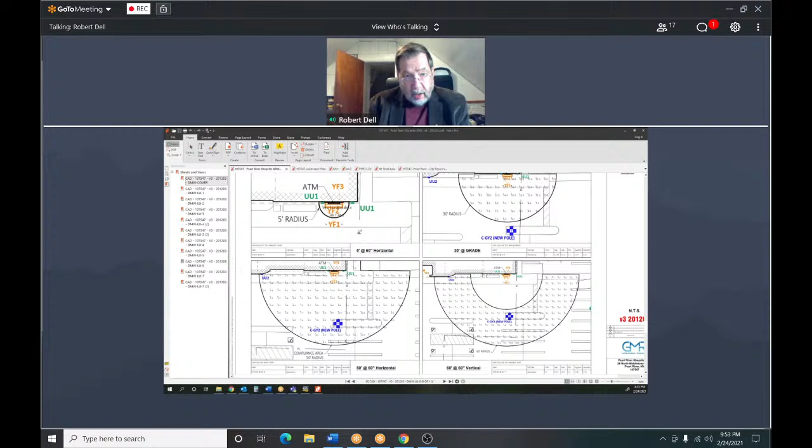Mr. Dell? Yes, am I correct this will be going to ARB after us, or will it not? I don't know, Ms. Slavin? The next step would be ARB, but in a situation like this, where it is a relatively simple application, the applicant, who obviously is from Dallas, would not know that he has the ability to ask for that to be waived in this consideration. So that is something the planning board can do.

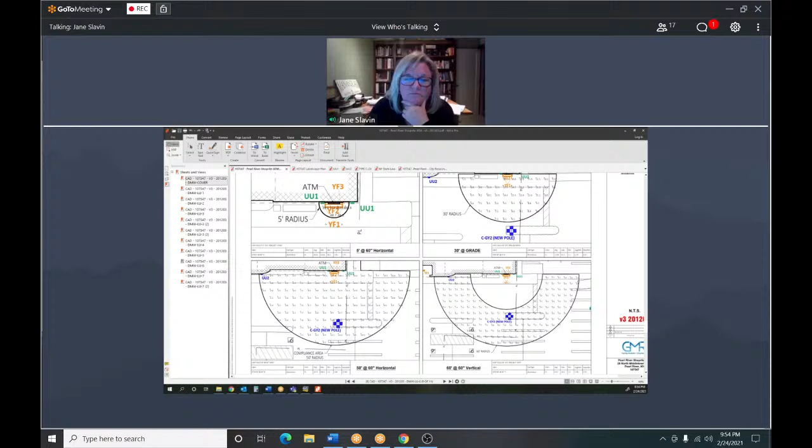Okay, when we get to the point I will ask. Yeah, so I don't know what exactly that is, I think it moves us forward, so anything that moves us forward quickly and smoothly. Right, so we have a planning board and we have an architectural review board. The planning board does have the authority to waive the requirement of going to ARB, especially in a situation where an application is this straightforward. So if the planning board sees fit to do that, you would have to request that, though. Yeah, if I can just do it verbally, I can do that now, because I think that would be great. I was going to ask you later on, but I will anyway. So keep that smile, but we'll keep right on going. Okay. Thank you very much, Mr. Dell. Okay, sir, thank you for that clarification.

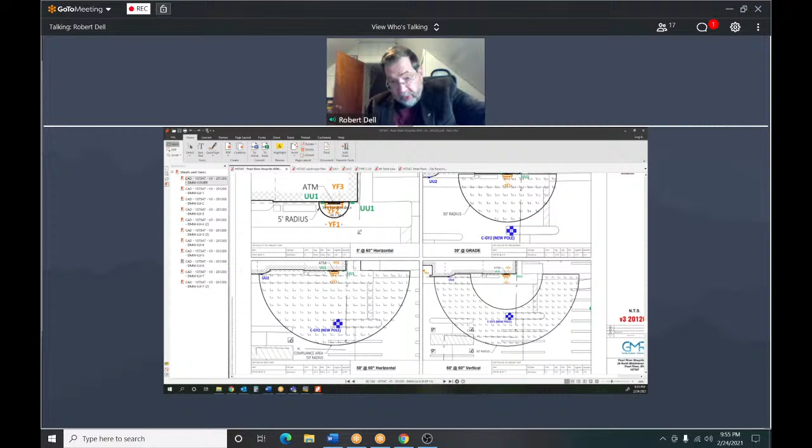As has been said, its impact visually on the area will be de minimis. There are not really any residential houses close enough, in my opinion, to be affected by this existing condition. Obviously with the new technology, with the LEDs, there are changes, of course. Are you putting in any new fixtures? I think your height is 26 feet above grade, is that it, the bottom of the luminaire? Yes, maximum, there'll be two new fixtures.

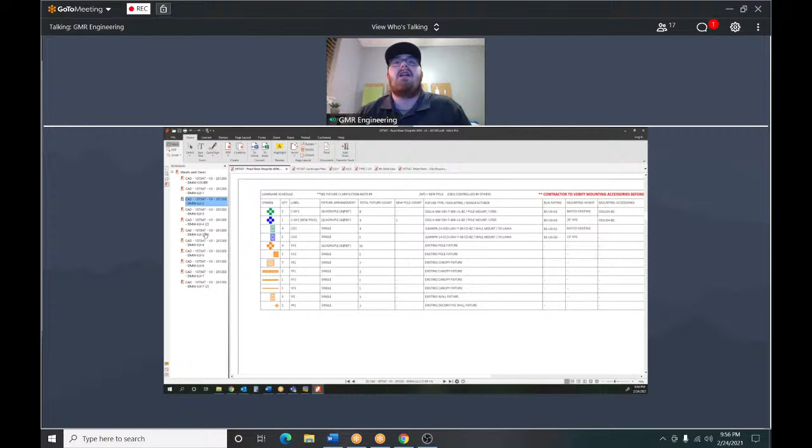There's one new pole in the parking lot that will match existing at 26 foot. And then we're going to add one wall pack on the building at 13 foot, which you can see right here. This UU2 fixture is to get that 50-foot radius, which I can show you here. That's mainly to get this area right here and then this area right here.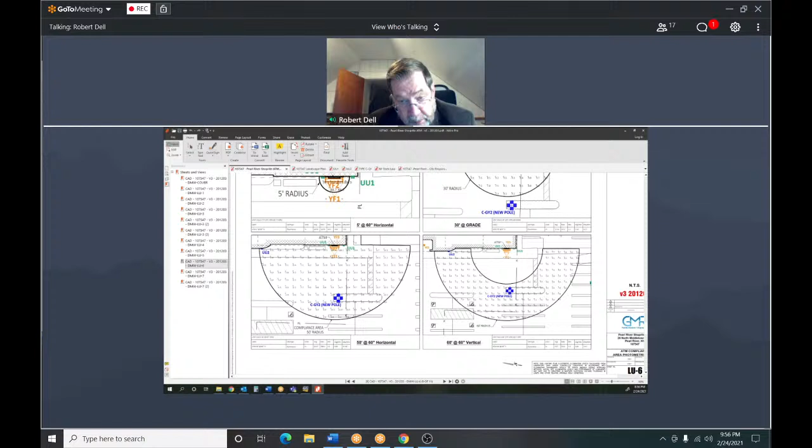Okay, now I'm just making sure this is all put on the record. You know how to read plans here, but I think in this case, even though it's not ACABOR for many years, I myself will favor that you go ahead directly without having to go through an extra hearing. I'm just trying to justify that for the record. Those are all of my questions. The impact and change is really not going to be that significant, except to improve the safety of the area.

Thank you very much, Mr. Chair. Okay, Mr. Andrews. I'm good with the whole plan and for him avoiding ACABOR. Okay, thank you very much, sir. Mr. McCrory.

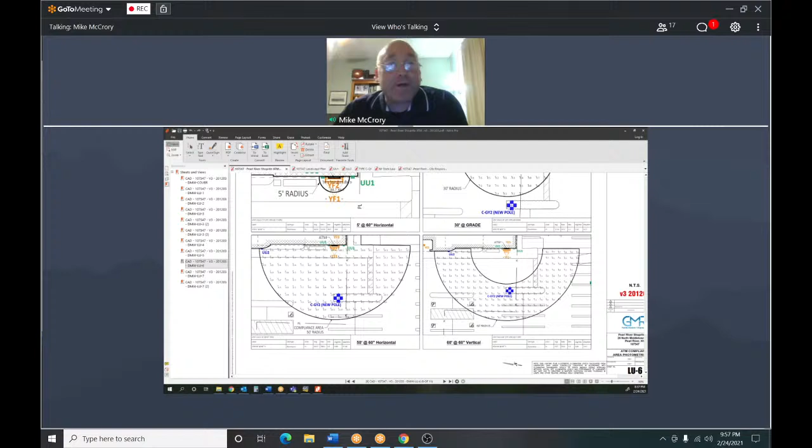Thank you, Chairman. I'm at ShopRite like 3 times a week, so any improvement I agree with. I just can't believe you got to do all this for the ATM, and that the landlord doesn't have to improve the lighting over there. But it's a straightforward plan. I agree with waiving ACABOR, and good luck with it. Thank you. Okay, thank you, sir.

Mr. Bond. Yeah, it's pretty cut and dry, and I have no problem waiving ACABOR. Okay, thank you very much.

I'm going to open it up to the public. Anybody from the public wish to speak on this? Okay, one more time. Anybody from the public wish to speak on this? Okay, hearing none. Can I have a motion to close the public session? Mr. Young makes the motion to close it. Mr. Sweeney seconds it. All in favor? Aye. Opposed? Any opposition? No. Okay.

Can I have a motion for final with conditions? Make sure, I think we have to reaffirm SEQRA. Motion for neg dec, Andrews. Mr. Andrews makes a motion for neg dec. Do I have a second? Mr. Mandel seconds. Okay, all in favor? Aye. Opposed? Aye.

Motion for... yes, I lost my train of thought. I'm sorry, SEQRA. Mr. Sweeney makes a motion for SEQRA. Do I have a second? Second, Mr. Mandel. Okay, Mr. Mandel. All in favor? Aye.

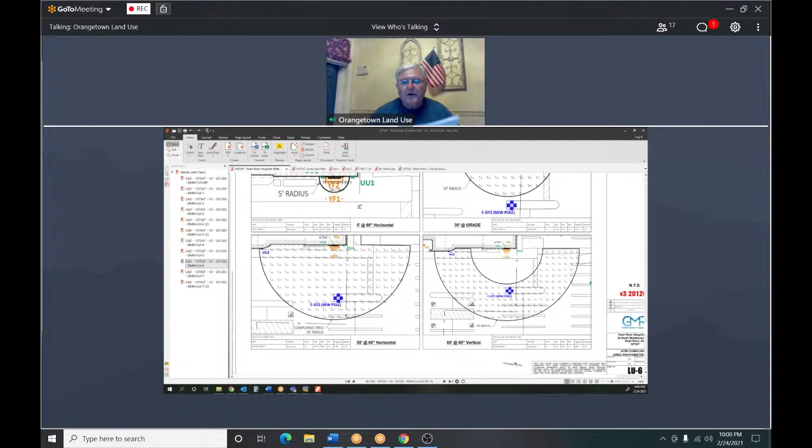Have fun in Texas. Stay warm and keep that kid warm. And thank you guys. Y'all have a good night. Yeah, you too. Thank you very much.

Okay, PB 21-15, Kennedy site plan.

Should I, am I supposed to introduce the project? Hello. Meg, we got you, we don't see you, but that's okay. Oh, okay, I see me on here, but okay. Yeah, Meg, you're not showing up. I also made you a presenter. I don't know if you want to put up a drawing on the screen, or do you want me to do it? Sure, I'll share my screen. Can you see my screen now? Nope. No, it's not coming up. Do I click something or just show you my screen? You have to click share your screen. Okay, hold on a second. Sorry, I'm not that great at this.

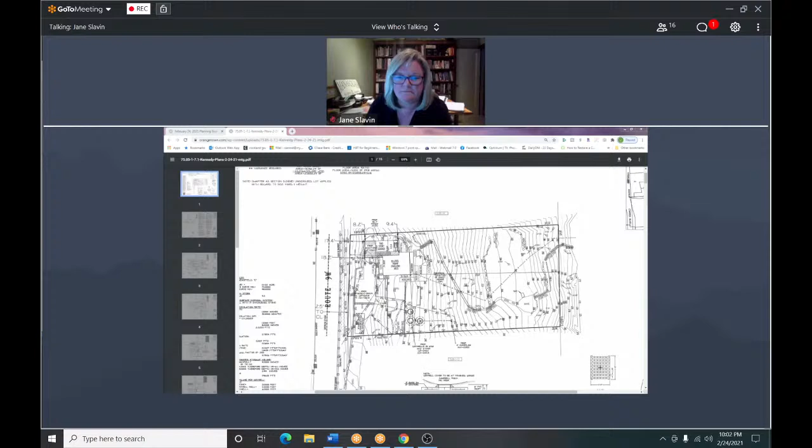This is a project where the existing residence has a house and a garage, which is detached but only 5 feet away from the house. If you look at the site, you see where it's labeled 2-story garage, and then the house is next to that. So we're proposing to attach the 2 structures and make it useful.

One of the other problems the owner has is that this existing 2-story garage is at 90 degrees to the driveway, so you come down the driveway and can't really even turn into the garage. It's not useless, though—it's full of storage right now. But we intend on making the site much more useful to the owner, hopefully.

So it's a very tricky project. We had to put a stair in the middle of these 2 structures, make it internal, and connect the various levels because everything's a little out of level. But I think it'll be a really nice, useful, and hopefully beautiful addition to the home for the family.

The footprint of the proposed additions is currently impervious. Where we're putting the garage on the left side, the west of the property, is gravel paving, and the small portion we're proposing on the river side of the garage is currently a concrete pad. So we're not increasing any lot coverage, so to speak, or increasing the impervious area.

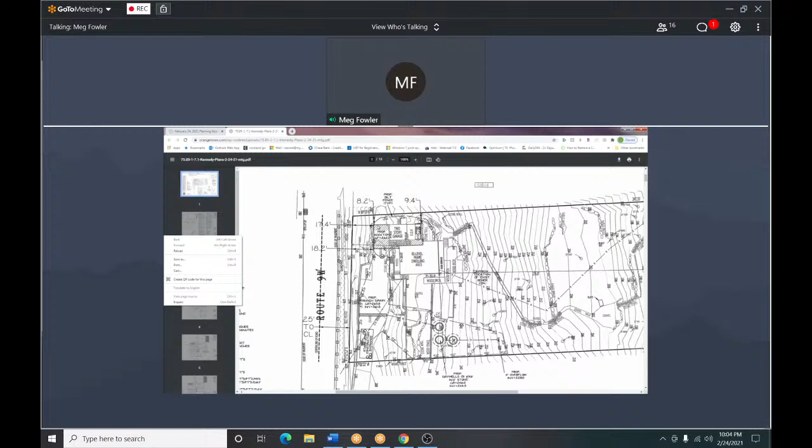Did we lose Meg? Yeah, I'm not hearing her. Her microphone's on, but I don't see her. Yeah, she might be having issues. Can everyone see the screen? Do they understand what's going on?

So, if anybody has any questions, I can explain it. Paul Gdansky is the site engineer, he's on the line.

I think she pretty much hit all the points. There's no increase in impervious coverage. The owner has complained about all the water rushing down his driveway, so we proposed a trench drain to help collect it, even though it goes in that general direction anyway. We figured we'd slow it down a bit by putting in some dry wells. That's basically the extent of the project.

Okay, thank you very much. I'll read in the consultant's reports.

Office of Building, Zoning and Planning, Jane Slavin, January 19th, has 2 comments. Department of Environmental Management and Engineering, Bruce Peters, February 24th, has 6 comments. The Bureau of Fire Prevention, January 24th, has 1 comment.

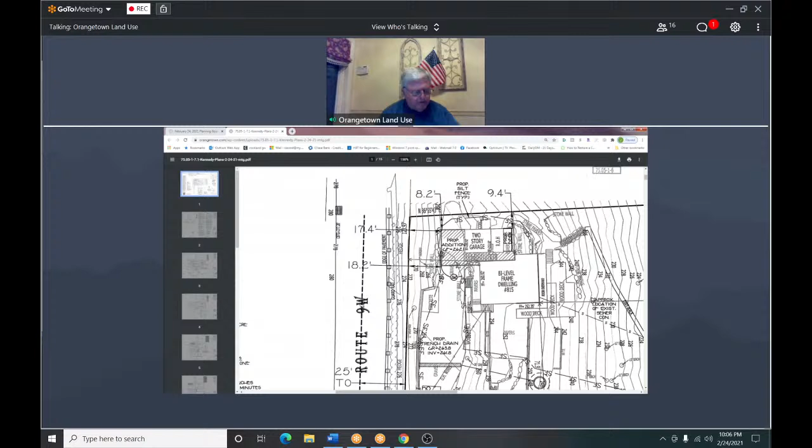The Village of Grandview on the Hudson has no objections to the Orangetown Planning Board acting as lead agent for the project. I have a note serving as lead agent from the Orangetown ZBA dated February 3rd, and a letter from Orangetown ZBA saying no comments at this time, February 3rd.

I have a letter consenting that the Orangetown Planning Board would be lead agent, from the Rockland County Planning Board, February 17th. Rockland County Highway Department sent notice that Orangetown Planning Board/ZBA be lead agent, January 28th, with no comment at this time. Village of Grandview on the Hudson, dated January 27th, no comment at this time.

And that's all I have. Cheryl, do you have anything additional? That's all, Tom. Thank you very much. Mr. Young.

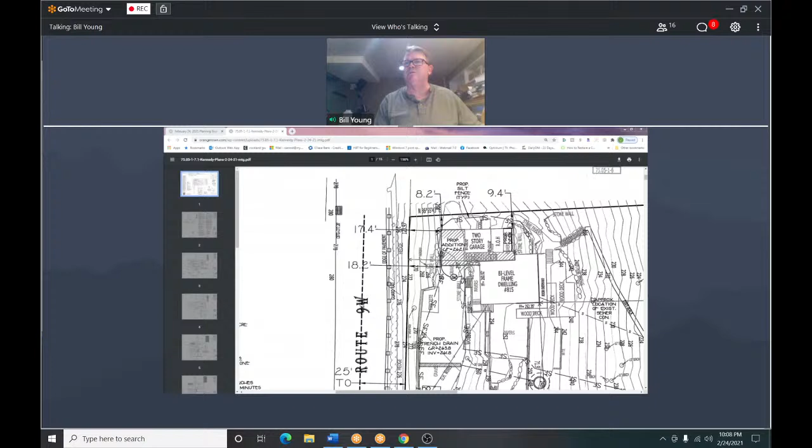Mr. Chairman, the comments I had—Ms. Slavin pointed out the variances, so you couldn't go to final tonight anyway. Mr. Gdansky answered the questions regarding the dry wells. There was a question that Bruce Peters had on his first comment, and I'm concerned about his second comment as well, with the dry wells. That's all I had, Mr. Chairman.

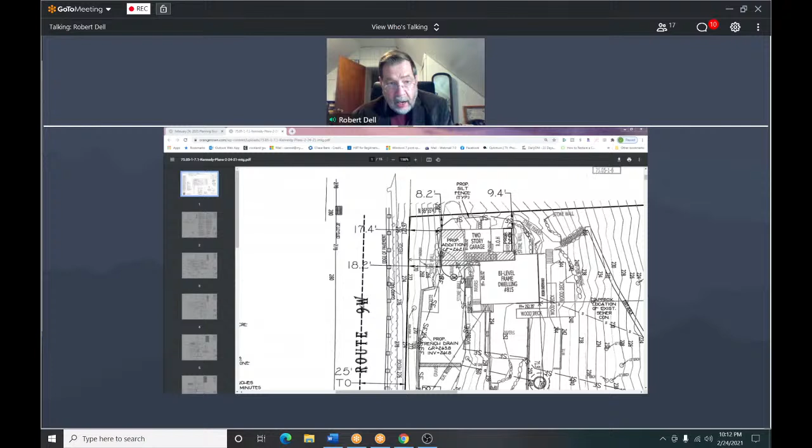We'd be happy to do that. That's just a home study, not any sort of office. I know, but when you get into office, I believe you have to go through a substantial variance to get that for home occupation, at least when I had something like that. Is that Meg? Meg, are you back on? Yes, I am back on. Okay, sorry about that, I don't know what happened.

We'd be happy to rename that on the plan. That's fine, I think you might want to, just for the sake of clarity of the record. You may have an existing variance for that, or maybe the codes have changed somewhat. But usually when you call it an office, that implies home occupation, even though that's a very nebulous area, particularly in the days of COVID. Okay, so those are my major concerns. I would like, as I said, to hear what the people to the north have to say.

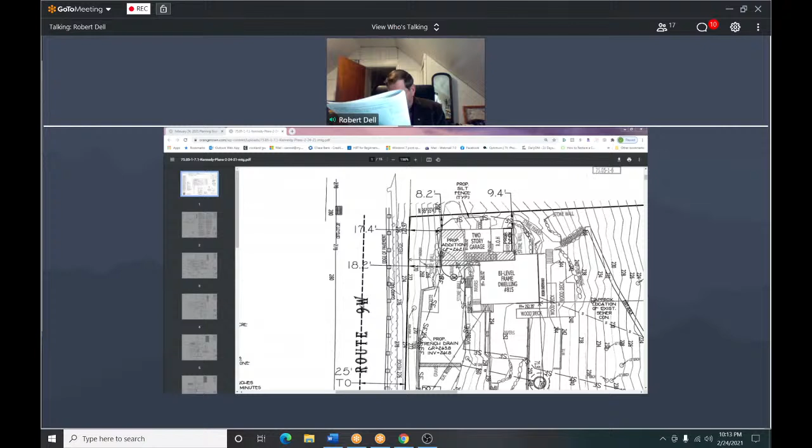Obviously, you have just about enough room to put this in safely. I see that you're putting in silt fence, but on the lower down slope of the silt fence, just to be safe, I think you should also put in hay bales, because you're dealing with a substantial slope in this area. I think that's a minor request that should not be problematic. Yeah, no problem. Okay, thank you very much. And that is a comment of Mr. Peters actually - the hay bales are required, number 4 of his comments.

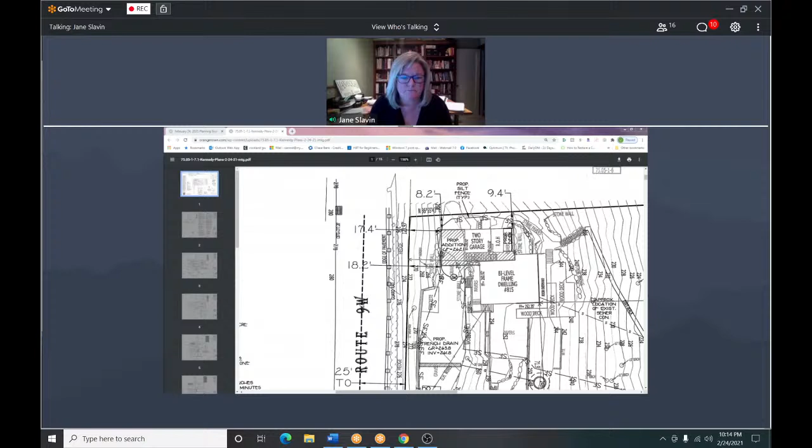Thank you, Ms. Slavin. Okay, Mr. Andrews. I have no comments at this time. Thank you very much, sir. Mr. McCrory.

Thank you, Chairman. Yeah, looks like improvement to a single-family home. The only reason they're here is because of the location of the house. As long as they have no problems with the variances and meeting all the comments, it's good with preliminary. They're going to have to come back for final. And that's it, see you when you come back.

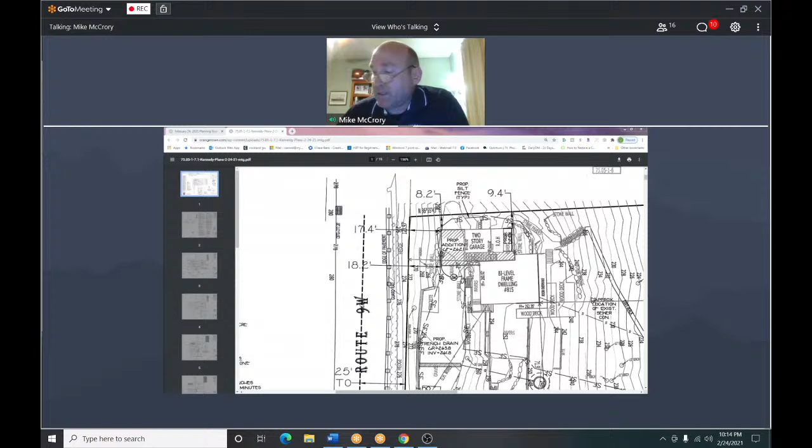Thank you, sir. Okay, Mr. Bond. No, I have no comments. Okay, thank you very much. I'm going to open it up to the public. Anybody from the public wish to make any questions or comments on this application?

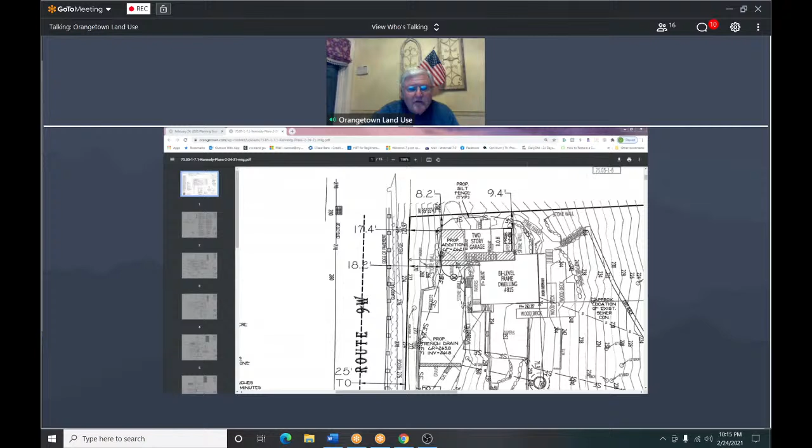Okay, one more time. Anybody from the public have any questions or comments on this application? Hearing none, can I ask for a motion to close the public? Motion to close the public, Mr. Young makes the motion. Mr. Sweeney seconds it. All in favor? Aye. Any opposition? No opposition. Thank you.

I think there's a lot that Mr. Peters has, so if the board recommends we go ahead with preliminary, I would ask for a motion for lead agency. Mr. Sweeney makes the motion for lead agency. Do I have a second? Second, Mr. Mandel. Mr. Mandel seconds.

Okay, make a motion for neg dec. Motion for neg dec, Mr. Mandel makes a motion for neg dec. Mr. Young seconds it. All in favor? Aye. Any opposed? None. Motion for preliminary with conditions.

Do I have that motion? Mr. Sweeney makes that. Okay, so preliminary conditions are: Jane Slavin, February 19th, 2 items. Department of Environmental Management and Engineering, Bruce Peters, February 24th, has 6 items. Bureau of Fire Prevention, January 24th, has 1. Brooker Engineering, February 8th, they have 8 items. Rockland County Department of Planning, February 22nd, has 7 items. Rockland County Sewer District Number 1, dated February 8th, has 2. Village of Grandview, January 27th, the letter. And that's all I have.